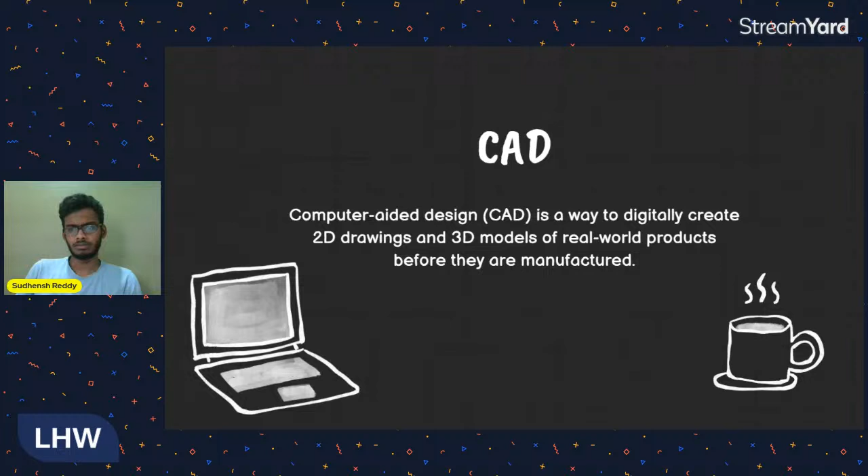CAD is abbreviated as computer aided design. CAD is simply a concept which we use to design 3D models, 2D drawings, or even circuits before we manufacture, in order to ensure that they work properly, to check the efficiency, to check the power dissipation, to check the force or the amount of stress a particular component can withstand. After getting the desired results, we go forward and manufacture those things.

Then we assign materials to it. We customize the appearance, the shape or size of the material. Then we apply simulations, put the material under some stress, some strain, some force, and draw reports from that. According to that, we can draw some really good insights on what you're manufacturing or making, so that we can have a better picture of the material when we actually manufacture it.

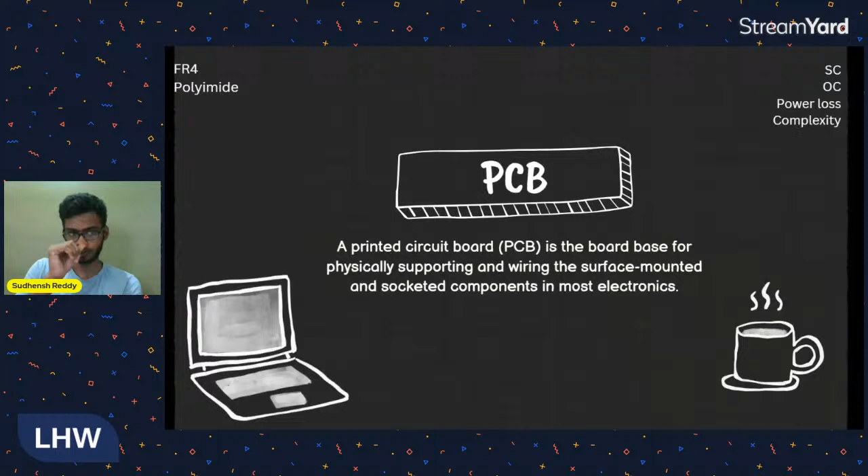Yeah. So first we'll look into PCBs. Our motive of this particular session will be mostly relying on PCBs. So what is a PCB? PCB is an insulating base on which we draw routing using copper layers, and then we mount our components onto it. So the inclusion of wires will be less. So the more wires you use, the more power it dissipates. The lesser you use, the more power you can save.

That is the reason we eliminate the wires totally, and then we embed those wires into the board. How and why, I'll explain. And these are the advantages which we get by using PCBs. The risk of short circuit and open circuit will be reduced, power loss will be reduced, and the complexity of the circuit will also be reduced.

Here are the materials which will be used for PCB manufacturing. FR4 is a very retardant material. It's a very rigid material. FR4 stands for FR means flame retardant, and 4 means it's a glass epoxy. FR4 is the material which we use for making rigid PCBs which can be broken when bent. And coming to polyimide, it is used for flexible PCBs.

Next, we'll have the composition of PCBs, what a PCB has to have in it to make it a PCB. Like basically, what are the parts or what are the layers a PCB will have? First of all, coming to substrate. Substrate will usually be made up of FR4 or polyimide, as I said. And over this substrate, we put on copper layers. Copper layer in the sense we wire those connections on the substrate.

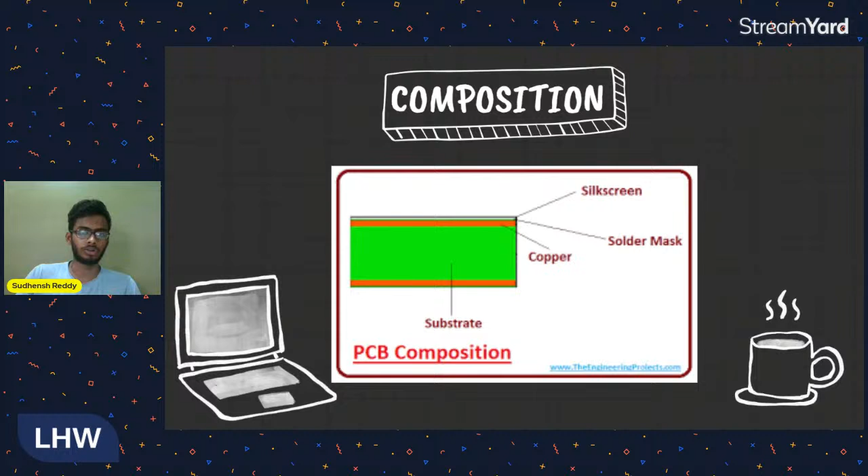On top of solder mask, we put on a silk screen. A few PCBs have a few naming conventions on that. Let's say I have a microcontroller, Arduino Uno. Arduino Uno has a bit of writing on it. The title of Arduino Uno, then each and every single pin named using some white sort of ink. That inking will be done on the silk screen, and it also gives the color and the glow of the PCB.

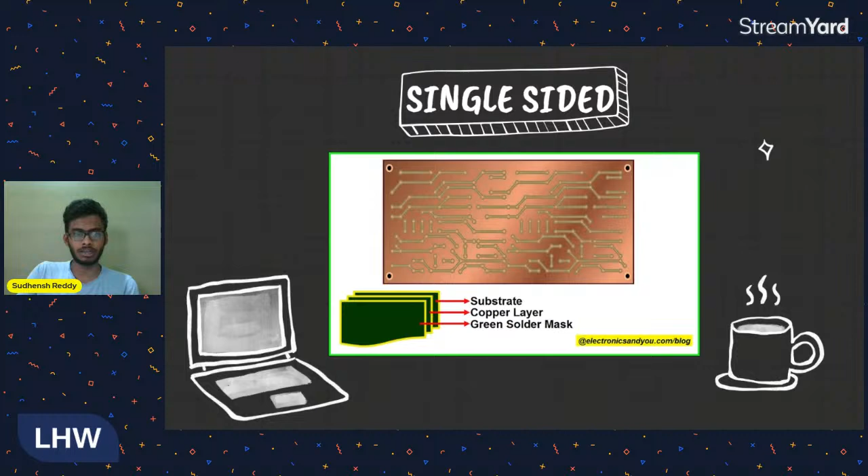Next, you have types of PCBs. All these types we'll look into in detail. First type being single-sided PCB. Single-sided PCB is a PCB which has a substrate in the middle. On top of that, we have copper layer. I mean, copper layer is only on one side of the PCB. Those sort of PCBs are called single-sided.

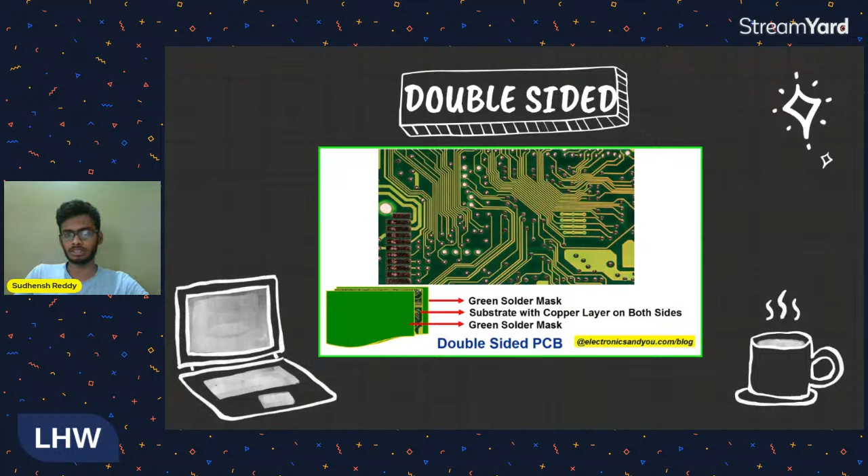Then we have double-sided. Double-sided has copper layers on both the sides. We have a substrate layer. On top, we have copper wiring. Underneath also, we have copper wiring. Solder mask and silk screen are mounted on top and bottom also.

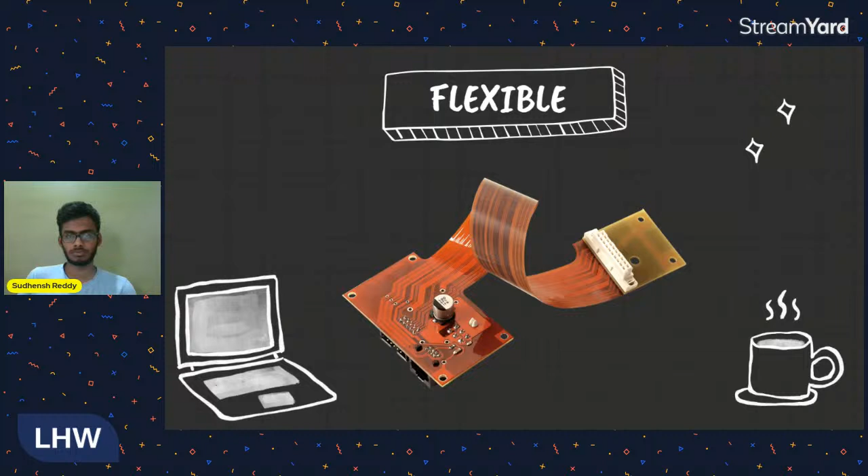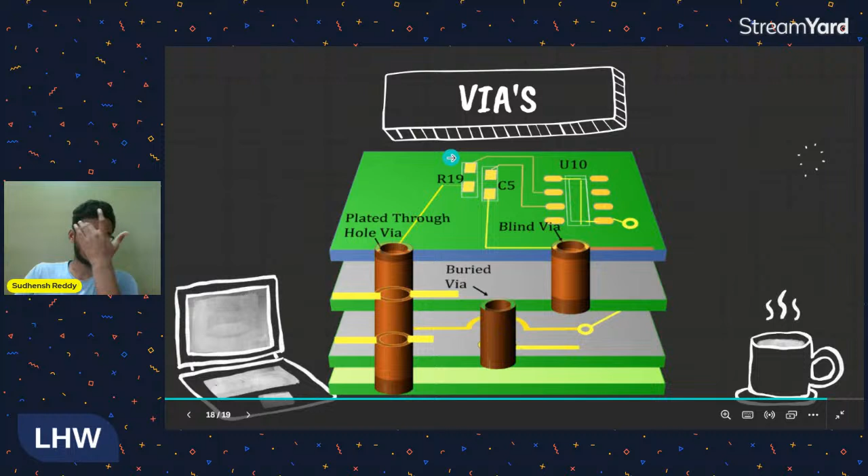Then we have vias. Vias are the concept which we use to connect the PCB layers. For example, here we can see the plated through hole via. Consider a multi-layered PCB. It has 4 layers, and a through hole via starts from the top of the PCB and goes to the bottommost layer of the PCB. Next, we have buried via. A buried via cannot be seen. It is somewhere in the middle, embedded between the top and the bottom layer.

Then we have blind via. Only one end of the via can be seen. The other is embedded somewhere in between. These are the parts which we use to connect the layers of the PCB. For example, the through-hole via connects the topmost and the bottommost layer. The buried via connects two layers somewhere in between the PCB, and the blind via connects the topmost to the second layer of the PCB.

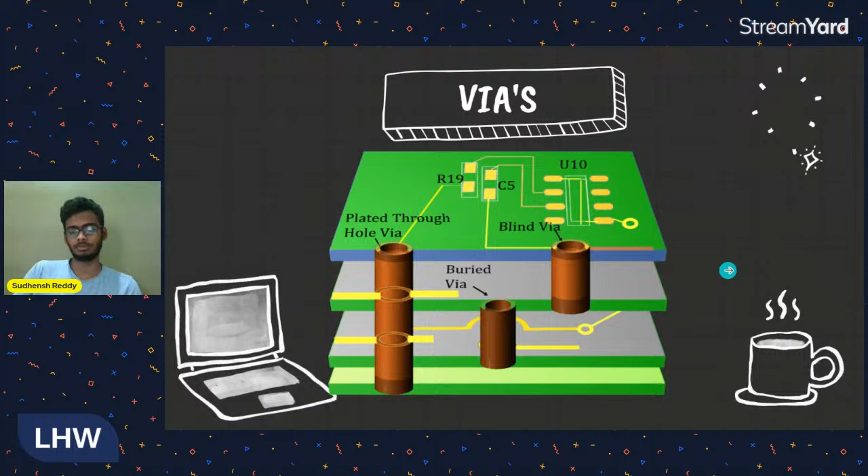These are the file formats which we use to design and manufacture PCBs. Coming to Gerber files and IPC files, these consist of the coordinates of the components and the wirings which we give in the software. I'll show you how to generate them. Then we have drill files. A few PCBs have holes to mount them onto something and make them steady. The size of the drill, the size of the hole, the diameter, the thickness of the PCB, etc., that kind of data will be held in drill files.

Then we have bill of materials. A PCB will definitely use some hardware components on it, and what we do is we create a bill of materials, in which we include the list of all the components which have to be mounted on it. Next, we have fabrication drawings. Fabrication drawings include the size and shape of the particular component or a particular PCB. We design these files and then we zip these files and we send them to the manufacturer.

Okay, this is it for the theory part. Next we'll be seeing how to design a PCB. Let me share my screen again.

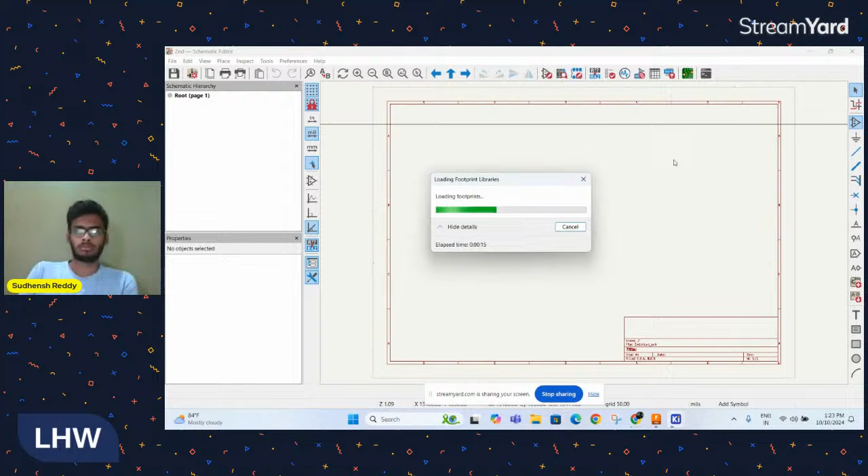First you have to open the schematic. Here we'll be designing the circuit of the PCB. Circuit in the sense the basic connections of the PCB, the basic materials, the basic components which we are using. For that, there is a symbol over here, Add Symbol. Click on that. All the libraries will be loaded. Let's wait till the libraries load.

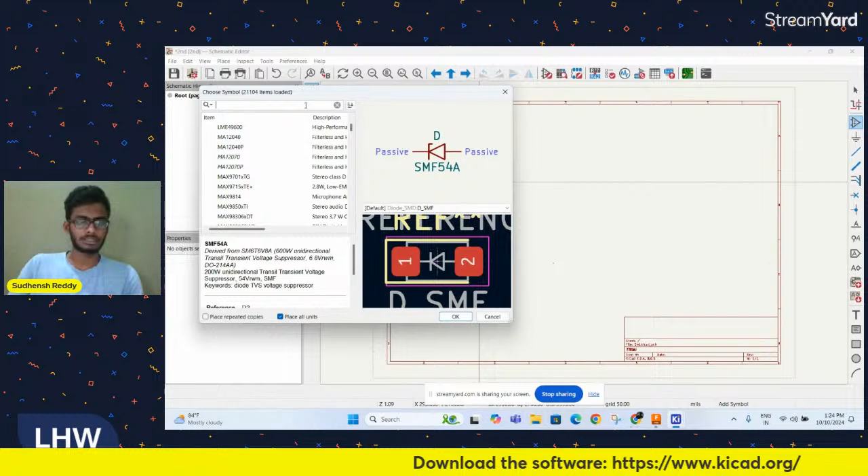Yeah. So these are the items. These are all the components which KiCad has inbuilt. You can also customize and build your own components in this. First, let me take a resistor and drag and click. As you can see, I've placed a resistor.

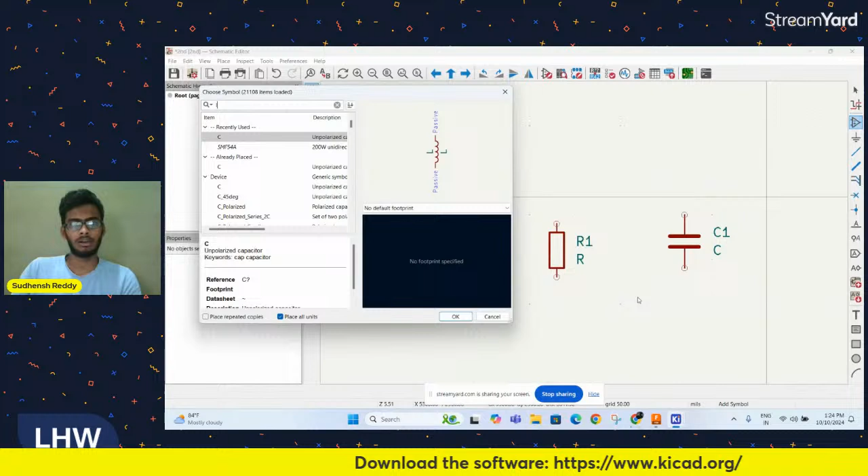Next, I'll go with the capacitor. I'll place it here. Then I'll go with an inductor, L. Okay. Now I have three components. I'll design a circuit which doesn't make sense, but just for a demo. Let's rotate this. Now let me connect these components together. All you have to do is hover your cursor at the terminals of the component. Just do this. Okay. Now my circuit is complete.

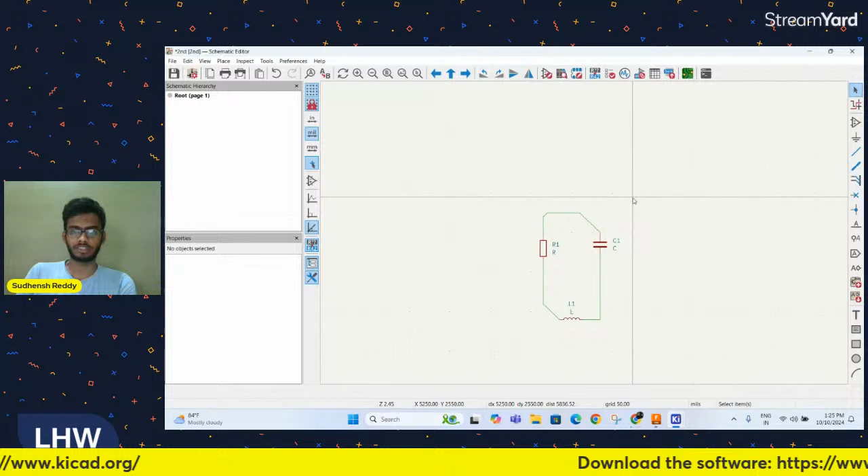Now, one important thing when it comes to PCBs, there are two simple terminologies we generally use: first one is symbol, and the second one is footprint. What is the difference between them? The things which you see over here, R1, a rectangle for the resistor, the two lines for capacitor, and the inductor symbol, these are known as symbols. Symbols are generally used to represent the particular component. Footprints represent the size and shape of the component which will appear after designing and manufacturing the PCB.

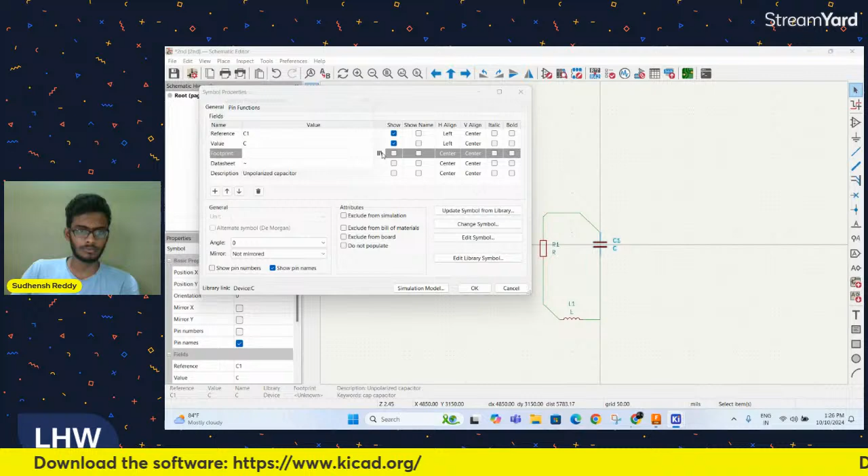For example, double click on this resistor. Here, as you can see, there is an option called footprint. We open the library and then I type resistor. These are all the footprints which we have. Each and every footprint has a different size and shape. As you can see, it is changing. So whatever footprint you need to use, you can use. I'll be using the first one, the footprint which I normally use. Every single component has its own footprints, so you can customize them as you wish. You can even design your own footprints in this software.

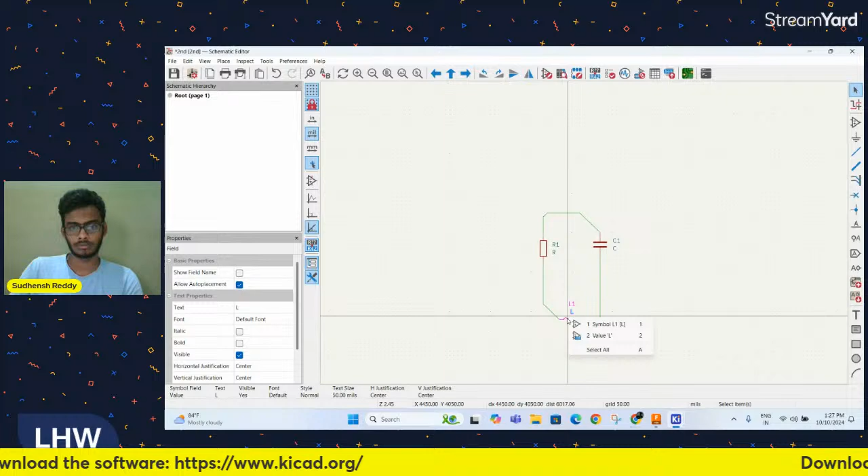Capacitor also has different sizes and shapes. I'll use the first one for now. Click on OK. Same goes with the inductor. Inductor also, I'll assign a footprint, and click on OK. Now that I have all my components, wired everything together and assigned footprints, I'll save it, go to Inspect and run ERC, electrical rules checker. It will check if I have any errors or warnings, any short circuits or open circuits. Once there are zero errors and zero warnings, you can proceed.

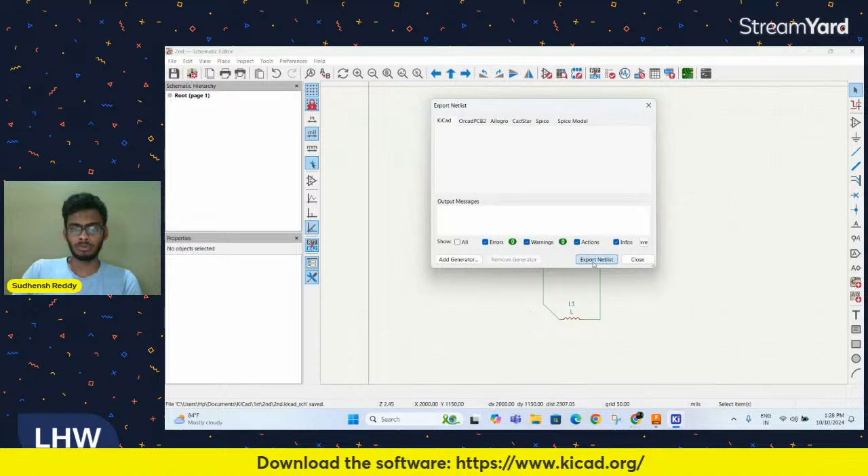Now we have to close this and export this into the PCB editor. This is a schematic editor; as I said, we design just the circuit here. In PCB editor, we design and customize our own PCB. For that, click on File, then Export, then Netlist. Now click on Export Netlist. Name it as you wish. I'll name it CH schematic, click OK, and click Save. For now, my work with schematic editor is done. I'll save it once more and minimize this.

Now, see. Second, this is the project file which I've created. Under this, we had a PCB file as well as a schematic file. But now I have a backup file as well as a .NET file. The .NET file represents the netlist file which we just exported from the schematic. So now I'll open my PCB file.

Yeah, this is the interface for the PCB editor. Here what I'll do is I'll click on File, I'll click on Import, I'll click on Netlist. Now click on this file and click on the .NET file which we just exported from the schematic editor, and click on Open. Now we have opened it. We have to load and test it. See here, total warnings are 0, errors are also 0. So we can proceed with that.

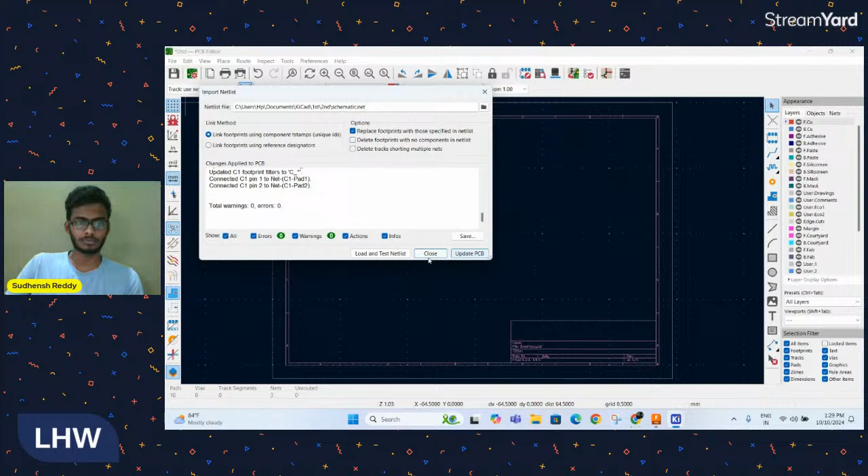Next, we click on Update PCB. Click on Close. Now we can see these are the components which we selected, and these are the footprints of them actually. And once you print the PCB, this is the original size of the components which will be appearing, the number of terminals and all. Now, this is the inductor, resistor, and capacitor.

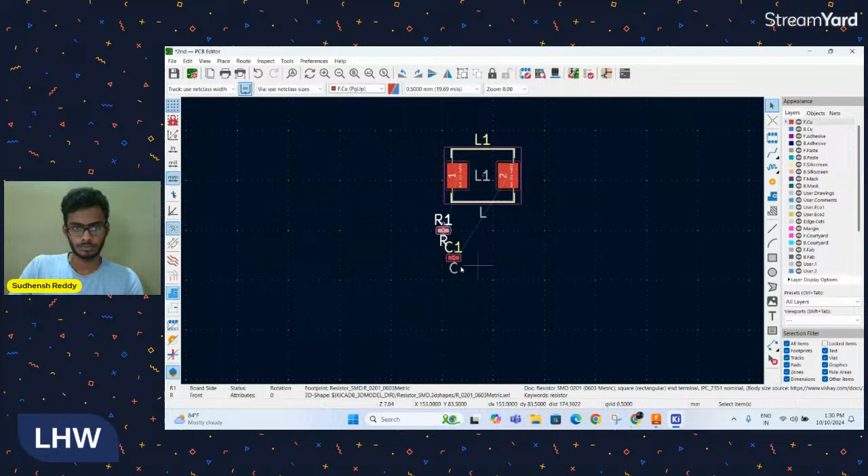So if you want to realign the components, just click on the component and click on M. You can simply click on M and you can move it. You don't have to drag, just hover the cursor and you can move. And next, I want my resistor to be more towards the right. So yeah, over here. Then I'll move my capacitor also. Click on M and I'll move it.

Okay. Now that I've moved, we'll start wiring also. As you can see, these faint blue lines represent the connections which you gave in the schematic editor. Apart from that, you have to manually wire also. You can use external plugins, but plugins can't be customized. That is the reason I'll try to manually wire them. So we'll use the route tracks over here. Select F.Cu copper wiring, and I click on this terminal and I'll simply wire them together. Done.

Now that the wiring has been done, the most important part of the PCB is the size and shape of the PCB, the edges of the PCB, how you want to customize them. I'll explain how to do that also. Now you can click on line and select the material as edge cuts. Now I want to assign some random shape to it. For example, like this. Done. So for now, this will be the outline of my PCB. All I have to do is save it, click on File, and Save.

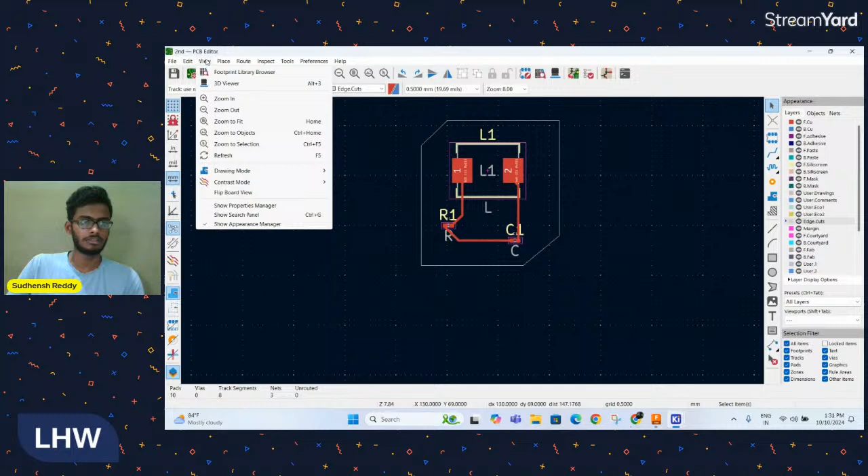Next, you have to go to View, 3D Viewer, and this is how my PCB will look after I manufacture it, after I print it. Okay. So now, as we are done with the PCB, I'll show you how to export this PCB and zip the files.

Click on File, and next click on Fabrication Outputs and click on Gerbers. So you'll find a pop-up, errors are 0 and warnings are 0. So click on Generate Drill Files, generate drill file, close. Now you can close this and minimize this, and you can see drill files. I've generated the drill files. Next we have to generate Gerber files also. Let me show. Click on File again, Fabrication Outputs, Gerber outputs, plot these ones. As soon as you see done, close. Now minimize this.

So for the copper wiring, for the edge cuts, for the silk screen, for each and every single component, a separate Gerber file will be generated. All you have to do is select all these files, zip them, and send it to the manufacturer. The manufacturer will decode these Gerber and drill files, and he'll print the PCB on the material which you intend to print. That's how PCB designing and PCB manufacturing works. I hope I'm clear for now.

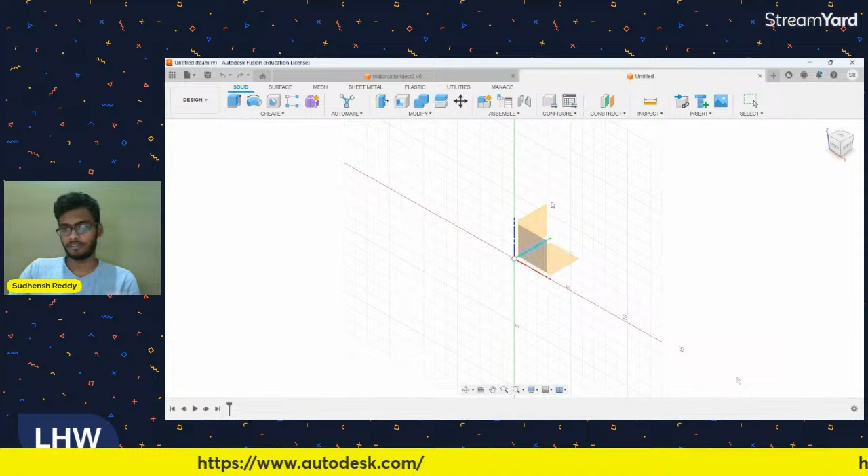So first we have create tools, then modify tools, assemble tools, construct tools. In Fusion 360, you can design 2D sketches as well as make them 3D. I'll show you how. First, click on create, then click on create sketch. Then click the plane: as you see, in 3D we have the XY, YZ, and ZX planes. Select whatever plane on which you want to create the 2D model. I'll select this one.

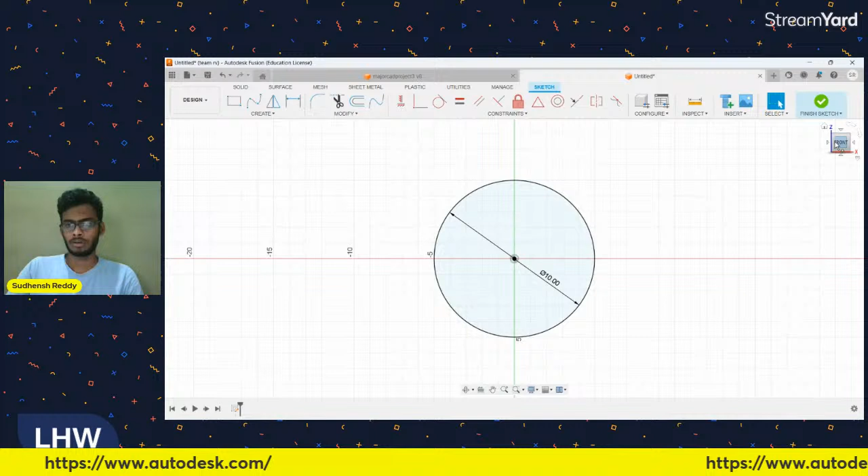Now click on create again. Here you'll get a few options of 2D diagrams. I'll select a circle, center diameter circle. Click in the center and drag. You can give it a measurement also. Now I have a 2D sketch of a circle. Next click on finish sketch. I have a 2D circle. Now how do I make this 3D? All you have to do is click on create again, then click on extrude.

The extrude option is used to add another dimension to the 2D model. As you can see, I have an arrow here. I can move this forward, making it 3D, or I can move it backward also. For now, I'll move it forward and give it a dimension of 5. Now I have a cylinder, made out of a circle.

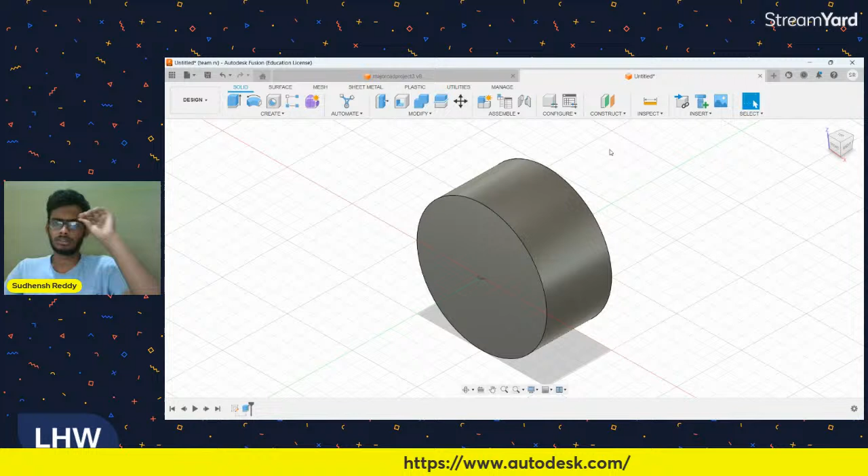Next, I'll show you how other tools work. We have hole. Hole is used to make this hollow, or create a single hole between the surfaces. I can move it, make it bigger, move it to the center, and I can also customize the depth of the hole. If I click OK, as you can see, the cylinder is hollowed now.

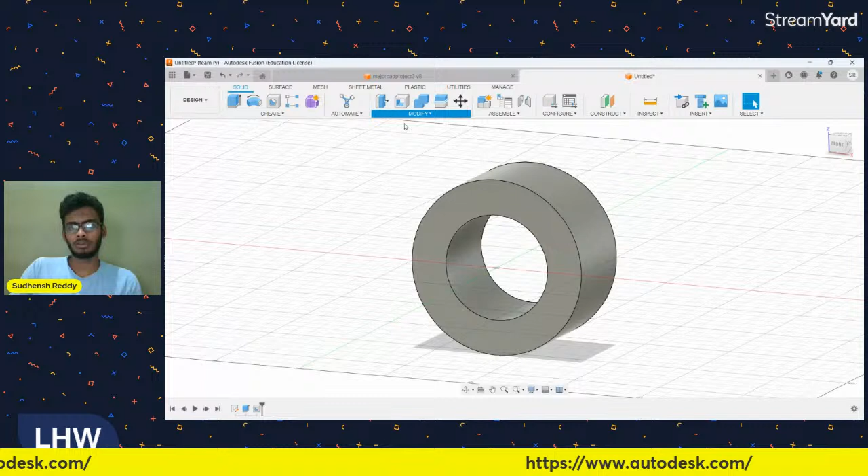Next we'll see a bit of the modify tools. In modify tools, we have press pull. Press pull is used to increase or decrease the size of a component. Let me select this face, and I can increase the size or decrease it. That's the use of the press pull option.

Next we have fillet. Fillet is used to smoothen up the edges. As you can see, it is not smoothened now. As soon as I push the arrow, the surface smoothens up — a curved surface will be appearing.

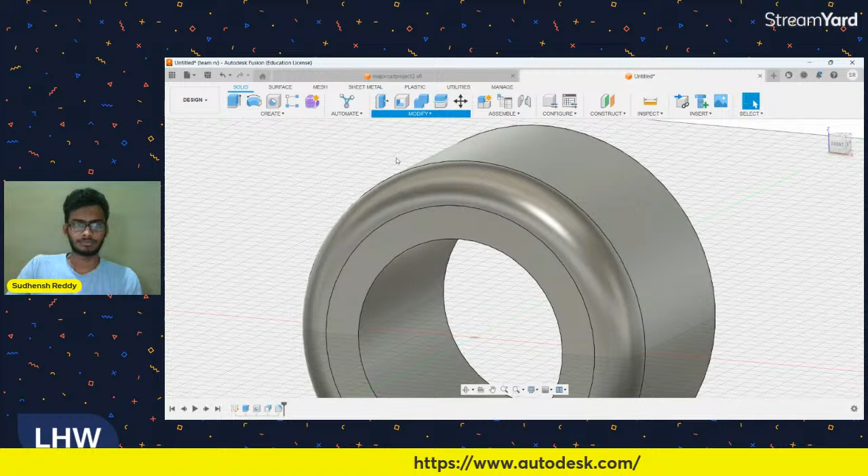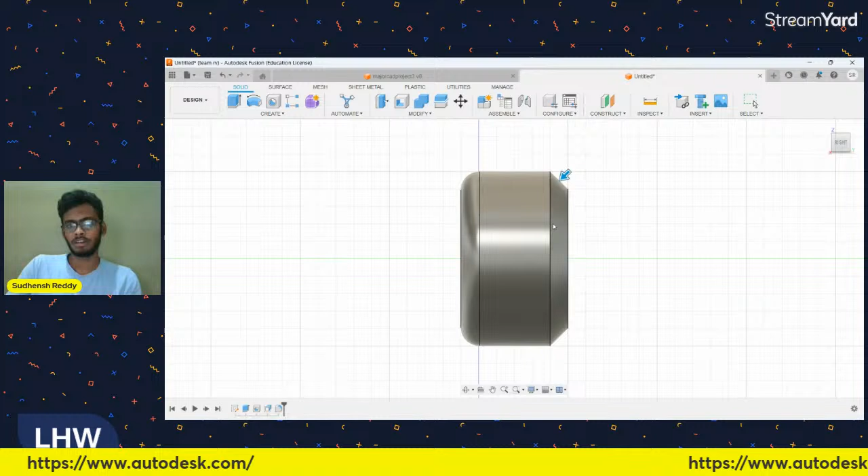Then we have chamfer. Chamfer doesn't necessarily smoothen it up, but it just gives it a planar sort of surface. Let me show you. This is the difference between a fillet and chamfer: fillet will simply smoothen up, curve up the surface, whereas chamfer just cuts it off.

Done. Next we have the shell tool. Shell is used to hollow up a surface. Then we have draft. Draft is used to cut a surface off, pulling a particular face into a single direction.

Scale. Scaling is used to increase or decrease the overall size of a material. The only difference between press pull and scale is press pull only changes one single dimension of the material, while scale changes all the dimensions of a material.

For example, I'll click on scale and select this. As you can see, the diameter, the thickness, and the length of the cylinder all change. Whereas when I use press pull, only one of the parameters can be changed at a time. That is the difference between press pull and scale.

Combine is used to combine two bodies into one single body. And next we have all these others — we don't use a lot of these tools. If you want, you can explore it a lot. This is actually a pretty fun software.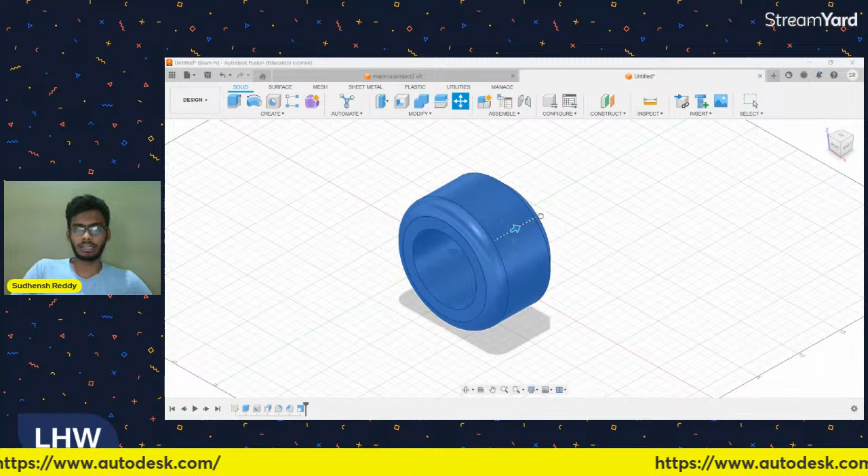Next we have move or copy. Move or copy is used to move a surface here and there in the plane, this way or this way, or I can simply rotate it in the direction which I want. That is the move option.

And then, if I want to create a copy of it, all I have to do is select the surface and click on create copy. As soon as I click on create copy, if I pull it in any direction, another copy of the material will be forming. That's the difference between the move option and the copy option.

Next we have the most important ones: physical material and appearances. Physical material changes the overall internal structure of the body.

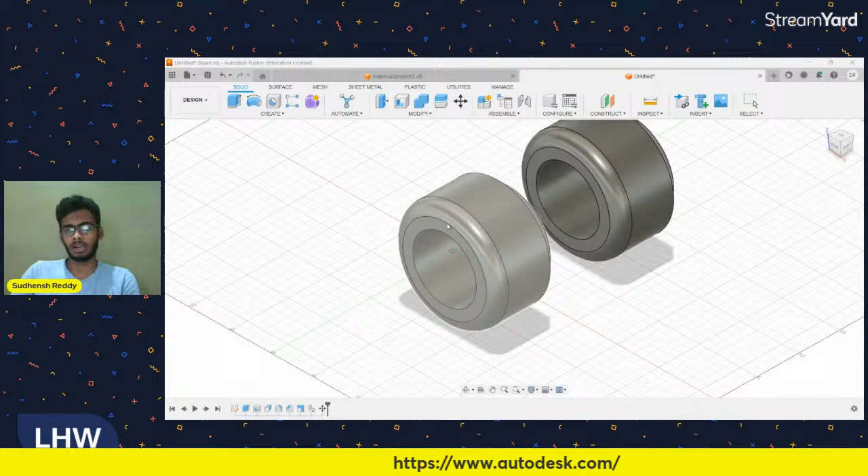For example, it's loading, wait a moment. As you can see, there are a lot of materials we can use: ceramic, electronics, liquid, metal, etc. The purpose of changing the material is for when we apply simulations on this. Mechanical components mainly depend on the material they are built up on. If I use a plastic material for this component and run simulations on it, the results will be different. Whereas if I use aluminum or steel, the results will be far more different, or maybe far more better. That is the reason we need to check whether we are using the right material or not.

I'll use, let's go with copper, cast copper. Drag and drop on both of them, and click on close.

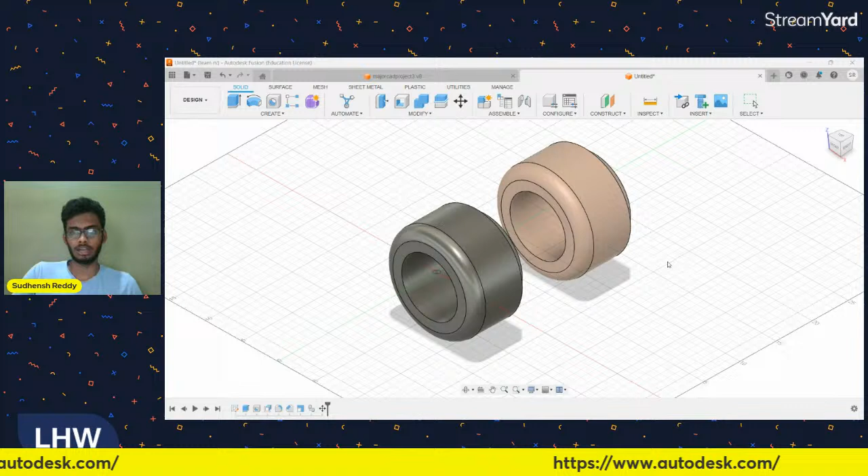The only difference between physical material and appearance is that physical material changes the component internally - the whole component will change its material. Whereas with appearance, if I select a material, the component will just be coated in that material. For example, let me take steel again. Here the internal material doesn't change - it's still copper, but just the outermost layer is now made of steel. I hope I'm clear. Now we can close this.

Now I've created two bodies. For time being, I'll delete the second one - we don't need it for now. Click on delete. Okay, now I have a singular body in my canvas.

Now I'll show you how to join two bodies. For that, I'll need to create another body, so we'll click on create sketch again. I'll select a plane. Now I'll create a cylinder which I need to fit into the previous body.

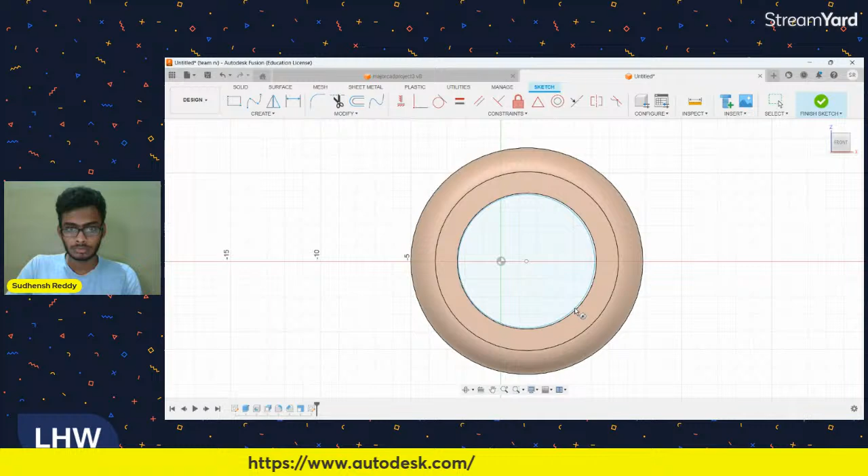So I'll click on circle again, center diameter circle, and I'll select the center and drag. Okay, now I'll click on finish sketch again. You see, there's a circle which I just drew, and we need to make it 3D again.

And guess what, we have to use extrude again. So click on create and click on extrude, then just press and pull, and I'll give it a random number as 20 - so 20 centimeters, new body, and okay.

One important thing is when you extrude a particular component, these are the operations which you can see: join, cut, and intersect. These options come to use when you try to extrude a body over another component.

For example, if you select join and you extrude your current component over an older component, then those two components will join and merge into one single body.

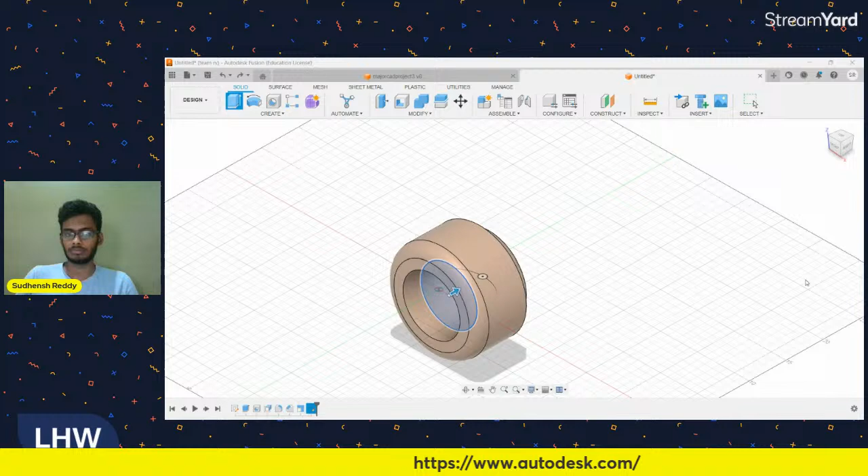Next, if I use cut, the current extruding which I do will simply cut off the material of the previous body. I'll show you an example - let me just draw a bigger circle.

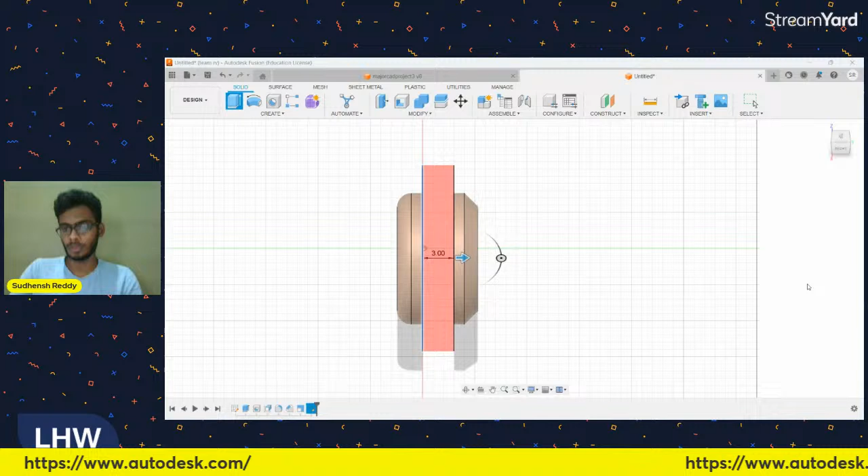Okay, now if I try to extrude this into the previous component which already exists, see the operation cut - click on that. The middle portion where I just extruded will just vanish.

And if I select the same circle again and extrude it again, but now I use join and click on OK, the previous component and the current component will simply merge into one single body. So you have to be careful here if you don't want to mess up your previous components.

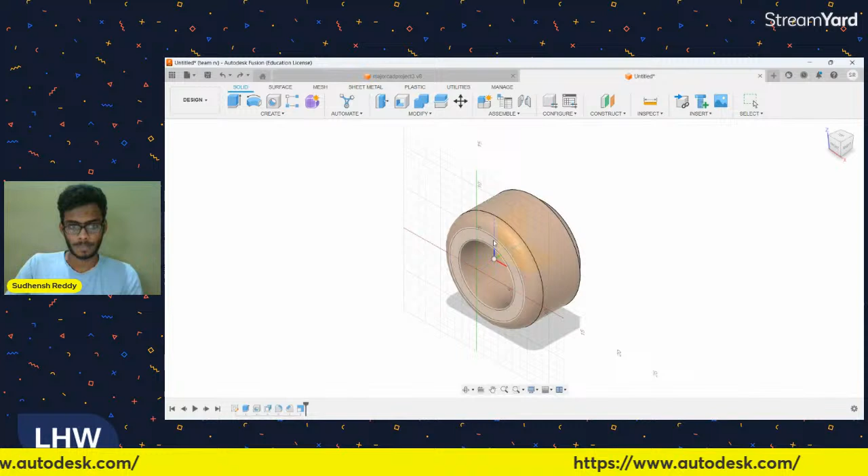I'll simply go back and create another circle - we'll continue with joints. And I'll extrude it, making it, and I'll select new component.

The difference between a body and a component is: a body forms when you extrude one single sketch one single time. If you combine multiple bodies, that forms into a component. You have to make sure you extrude it as a component, because you can apply joints only to components - bodies cannot be joined together using the joint option.

So I'll extrude this as a component now. Sorry, I made a mistake - I extruded the first cylinder as a body. You can edit that again - click on edit feature and then click on new component. No, no.

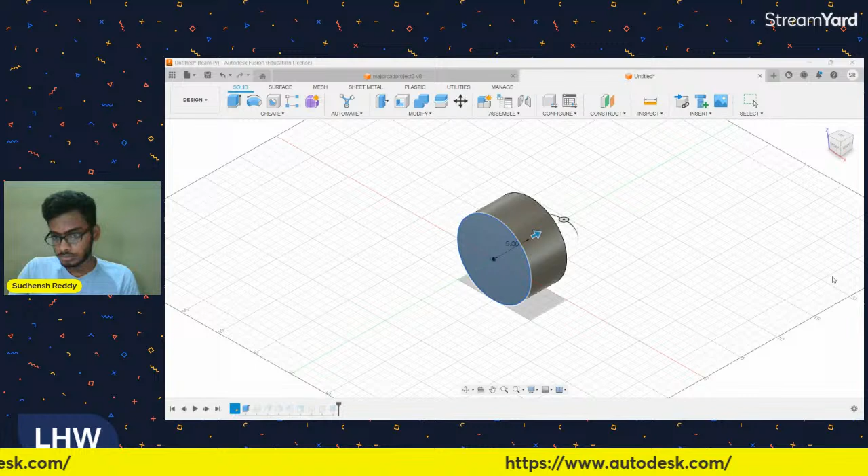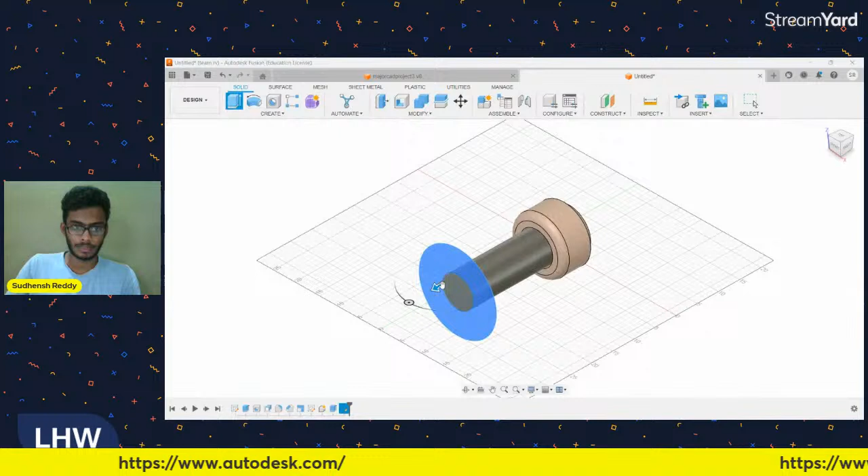Okay, we'll just design another cylinder for that. No worries, create sketch. Okay, and I'll select this and extrude this. So now I'll select new component again and click on OK.

This body is of no use, so I'll delete it for now. Delete - can't delete again. So now I have two separate components on which I can apply joints. I'll simply move this backward - move and copy, and I'll move this to separate them.

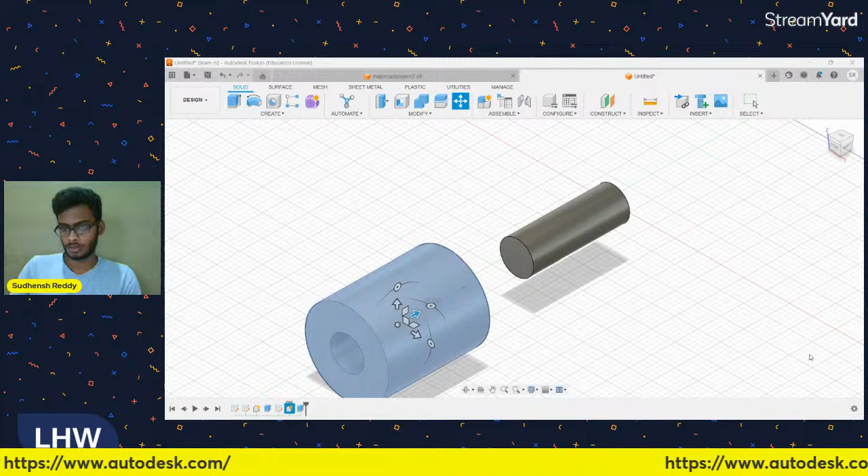Now I have two components - this is component one, and this is component two. On these two bodies, we'll try to add a few joints. For that, we have to click on assemble and click on joint. First thing, I'll show you the motions or the types of joints which we have in Fusion 360.

First of all, we have rigid joint - it will simply join the two components, but there will be no movement in that. Coming to revolute, in revolute the internal or external component can revolve inside or outside in clockwise or anti-clockwise direction, and that we can also customize. Then we have slider.

In slider, you can simply move one component inside and outside the body. Then we have cylindrical motion, which includes cylindrical and pin slot, much more common. Cylindrical and pin slot are a combination of slider and revolute. Coming to planar, we rotate a component in alignment with a single plane.

And next comes ball. For example, we have the ball and socket joint in our shoulder. The same sort of rotation, the same sort of movement we can give to the components.

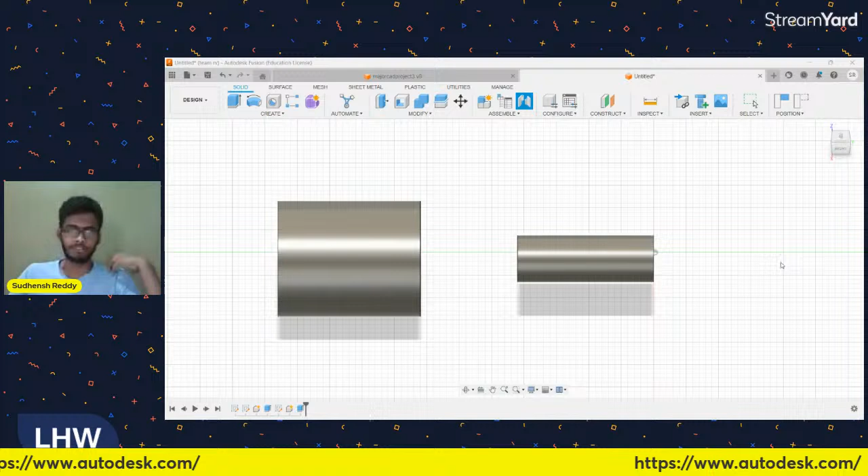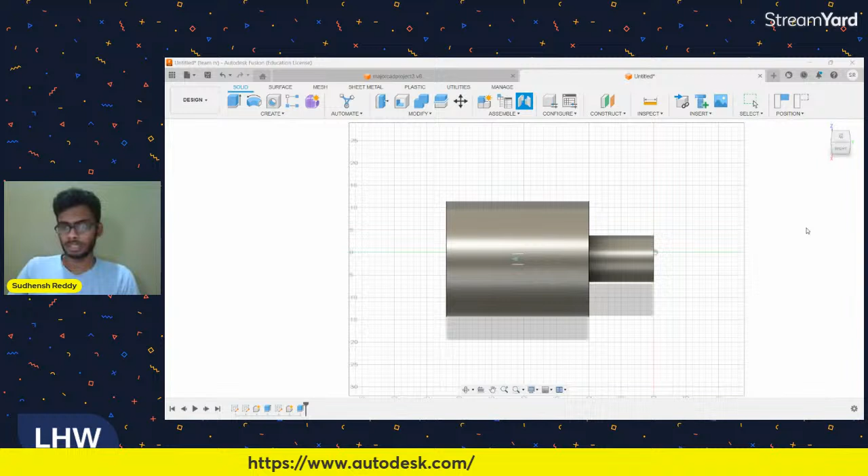So now I select the first component, which is this, and I'll select the second component, which is this. Now I'll give them some joint type. Rigid, it won't move. Revolute, it's actually revoluting. Slider, it will move in and out. Next we have cylindrical, it rotates as well as moves in and out. Pin slot, much more similar but in a different axis.

Next we have planar, I'll show planar again. Next we have ball, rotates just similar to our shoulder. For now, let's select revolute. As you can see, the revolution.

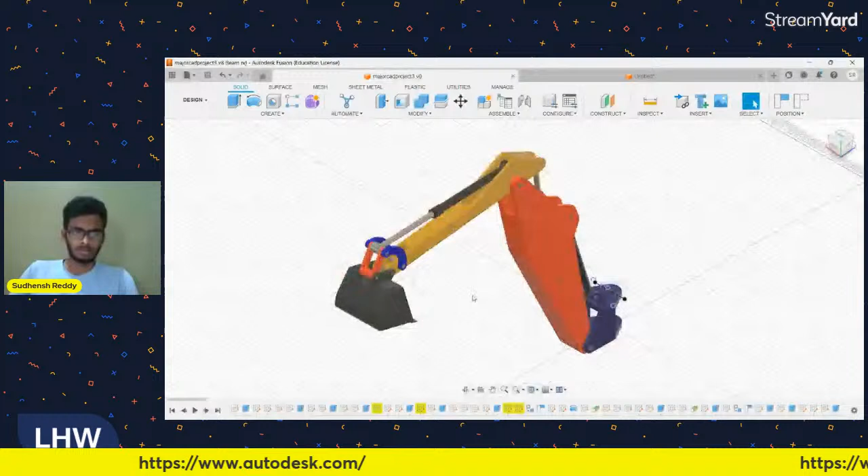So this is how you design and join a few things. Let me show one of my projects which I made by myself. It looks a bit complex, but it's very simple, very easy to make. All you have to do is ensure that your measurements are precise.

Just design stuff and join them properly. And these are all the joints which I use, a lot of revolute, and here are all the components which I used. And you can also move this here and there. Let me show.

You see, if your joints are properly functional, then you can also create these kind of movements and also generate a few animations with them.

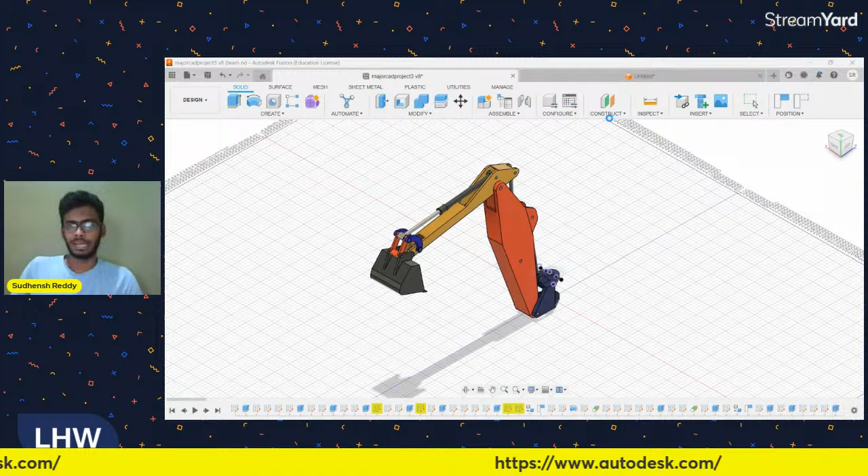I'll explain a few export types also for this. Let me save this. It's a bit laggy.

Now I have saved the component. Now to export this, you have to click on File, then click on Export, and these are all the file types which Fusion 360 supports for exporting. The most commonly used in Fusion 360 is F3D archive files, and for 3D printing we use STL files as well as OBJ files, which can be used for 3D printing.

I'll select STL and click on Export. Now my file will be exported directly into the folder which I choose, and that file can be imported into a slicer or a 3D printing software from which you can start your 3D printing.

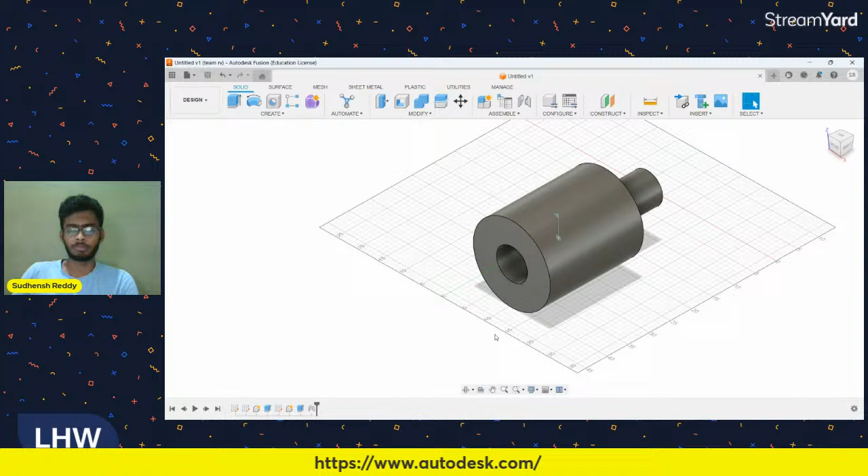Okay, now what else do we have with Fusion 360? We have this timeline. Timeline is a pretty handy tool which you can use. For example, I've done with my project, but I have to edit one single feature which I did long ago.

For example, this particular tool, this particular operation I did a long ago. I mean, this particular tool I extruded before extruding this one. So if I want to edit it, I can simply right click on this option and click on Edit Feature. Here I can edit it again.

For example, if I want to extrude it two sides, I can extrude. Or if I want to make it symmetric, I can make it symmetric. If I want to change the profile type, I can. If I want to change the distance or the taper angle or the operation also, I can change everything, and click OK.

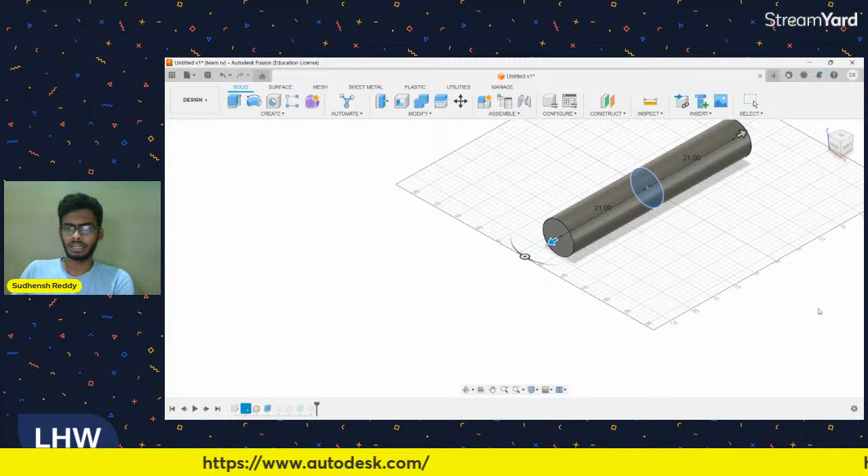But the later operations won't change again, they will remain intact. That is a positive thing about Fusion 360.

Other advantages are this particular software is reinforced with cloud. I mean, I can do one of my projects in one single device, open Fusion 360 in other device, log in through my account, and access the same project in the other devices also.

Okay, and there is also a mobile version of this software. In the mobile, you can use it to export and view your models, but you cannot edit them properly. So it's better to use a PC or a laptop for better comfort.

That is it with CAD and Fusion 360. We'll move further into circuit designing. Okay, any doubts with Fusion 360?

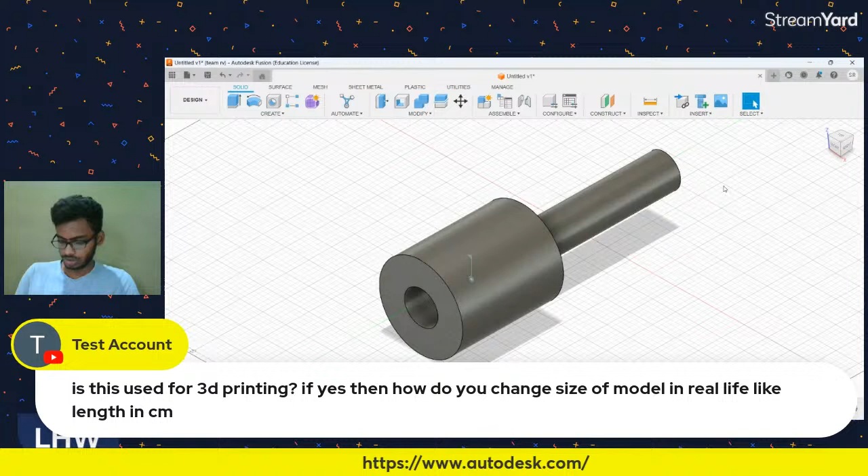I hope I was clear. Is this used for 3D printing? If yes, then how do you change size of model in real life, like length in centimeters? Yeah, this software can be used in 3D printing also. Any CAD software can be used. All you have to do is export the model as STL files or OBJ files.

And coming to your second question, how do you change size of model in real life, like length in centimeters? After 3D printing, there is no way to change the dimensions. If you want to change the dimensions, you have to change it in the software. Then you have to export it again as STL file or OBJ file. Then you have to import that file into the slicer or the 3D printing software. Then you have to reprint it again. There is no other way to change it.

Okay, hello. Would you recommend FreeCAD? It looks complex. Fusion 360 is the simplest one actually. FreeCAD is even more complex, as I have seen it. I've seen it once, but I didn't really think that it would be beginner friendly. Fusion 360 is better. As you can see, when you hover your cursor over them, every single option has a bit of description also.

If you are a beginner and you want some tutorials, this has inbuilt tutorials also. Sweep, again, it has a tutorial on what that tool does. Then you have loft, rib, etc. So I think Fusion 360 is better for beginners, not FreeCAD. I hope I'm clear. Done.

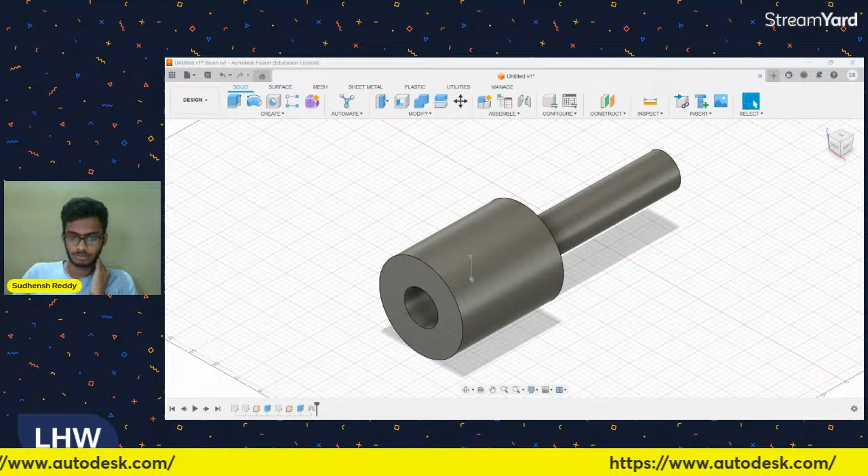Yeah, let's move on. We'll look into Tinkercad. Let me stop my screen. Yeah, Tinkercad is also one of the tools which is provided by Autodesk. Tinkercad is completely free. You don't have to use any sort of educational license or your ID card verification for that. You can access it anywhere. All you have to do is create your own account in that. I'll show how to use it and how to create a few circuits and how to simulate them also.

And coming to the important thing, the softwares which I just explained, Fusion 360 and KiCad, can also be used for freelancing. If you're a student and you want to earn some money without actually getting into a job, you can simply freelance. You can find opportunities on LinkedIn and in a few CAD and PCB communities also. So you can start it whenever you want. Whenever you have free time, just sit down, create an account, download the softwares, and you can tinker with them. No worries.

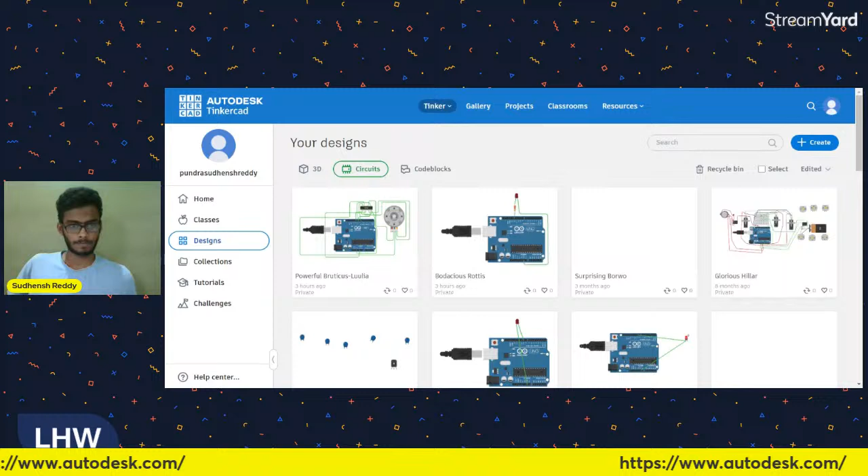And these softwares don't have any sort of project limit. You can create any number of projects you want. Okay? There is no limit. Next, we'll go with Tinkercad. Okay. Now, once you create your account, this is the user interface which you'll get once you open the tool. This is not exactly a software; it's a web tool, a website-based tool.

Here you can create code blocks, you can create circuits as well as 3D designs also. But for 3D designs and code blocks, it's not very efficient. But circuit designing might be a good option in this particular tool. So yeah, here are some of the designs I've made. I generally use this for circuit building. These are all the circuits which I made so far. Whenever I'm free, I'll simply open Tinkercad and start building circuits. This is also a fun tool which you can use for your projects as well as for passing your time. We'll see how to generate circuits over here first.

So once you create a new circuit, this will be the canvas where you can build your circuits. Let's build a simple switch circuit. Maybe I'll take an LED, then a resistor, then a switch. So we don't need a switch actually. Oh yeah. Then a battery. Three volts battery should be enough.

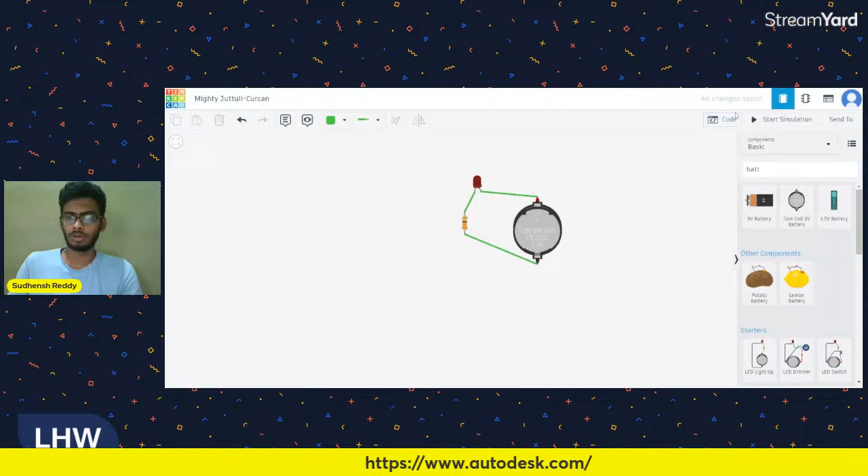I'll go with Arduino Uno. Click, and now I have an Arduino Uno. Arduino Uno is the most basic and the most commonly used microcontroller-based development board. On this, we have 14 digital pins and 6 analog pins.

This particular board can be used for making beginner projects, for example, traffic lights or a simple attendance marking system. From those basic projects, you can also use this to implement complex communication protocols, for example, serial peripheral interface, inter-integrated circuit protocol, or UART. Those are just a few examples.

A pretty handy component this is. It comes at around 600 to 700 rupees outside. You can just buy it and use it for your daily use projects as well as a few complex projects which you can use in your major projects in your coming years, in third or fourth year of your engineering.

Okay, now this is the complete board, and through this port you give power to this. You connect the USB cable to your laptop and to this port, then it will start. And next, this black IC which you see is the ATmega328P. ATmega328P, this is the actual microcontroller. The microcontroller is expanded and made into a single board.

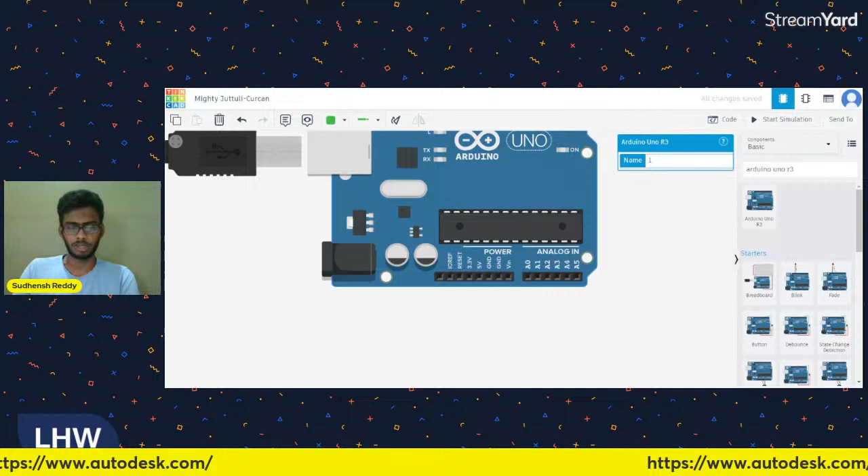Inside this microcontroller we have timers, counters, a miniature microprocessor, and a bit of storage also. As you can see, these are the power pins, analog pins, and then we have digital pins. The TX and RX pins are used for implementing communication protocols. Those can be wired protocols as well as wireless protocols.

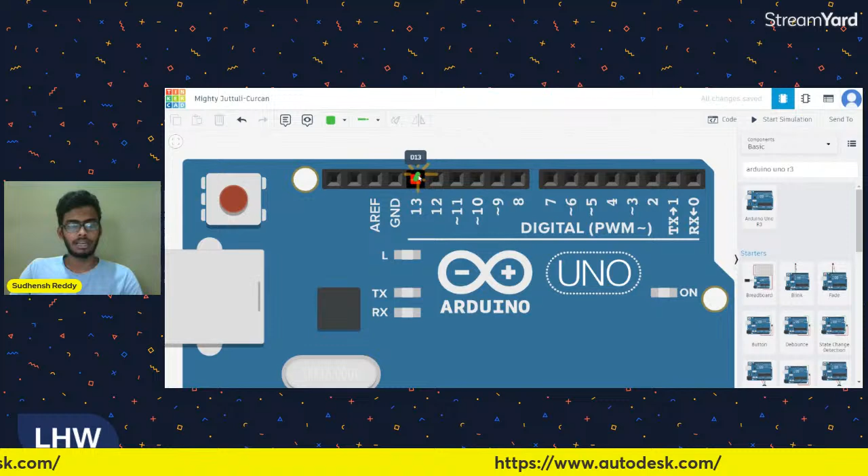Now, this particular microcontroller has an inbuilt LED at pin number 13. 13 is a digital pin. So we'll try to code that. I'll show you how to code that. Click on code. Here you have three options. You can code in blocks, in blocks and text, or in just text. I click on text and continue.

Here you have a default code for the inbuilt LED. I'll explain how the code works. The code for Arduino has two main driver functions, void setup and void loop, which have to exist in the program for Arduino Uno. Void setup is used to define the pins, and void loop is to write the logic for the pins.

For now, here the 13th pin, which is the built-in LED pin, I define that pin and I give output from it. Digital pins can have two functions: either give output or take input. You'll use input if you are using external sensors from which you have to take input. Then you can simply give the pin here, let's say the 12th pin, and write input. So you're just informing the microcontroller whether to take input or give output from this particular pin. Let's keep it unchanged for now.

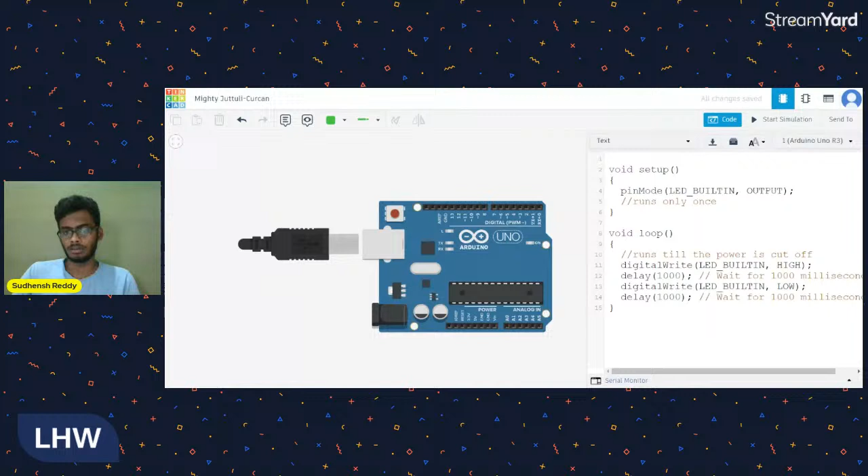Yeah. So void setup: as soon as you code this microcontroller and give power to it, void setup will run just once, whereas void loop will run till the power supply is cut off. Okay. Now, as we are done with code, we'll start simulation, and we have a simulation timer also.

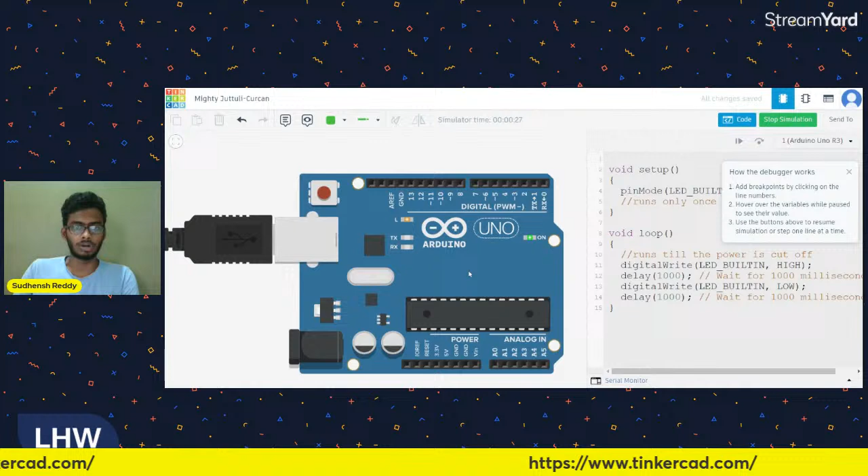As you can see, here is the built-in LED. It is blinking. I mean, it will stay on for 1000 milliseconds, which is 1 second, and it will turn off for 1000 milliseconds. Okay, and this is the LED which is used to determine whether the Arduino Uno is on or off. And there is a simulation timer also, and you can stop simulation and you can derive your required results.

So if we write some important things in loop, then it will be initialized again and again, right? I didn't get your question. Some important things in loop. Yeah, exactly. It doesn't matter what sort of function, what sort of operations you want to do. If you put those operations in void loop, it will keep on running till the power supply is cut off.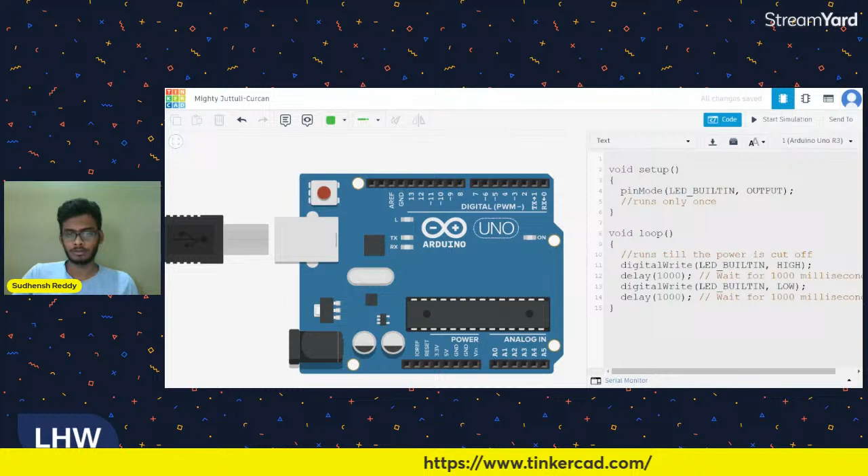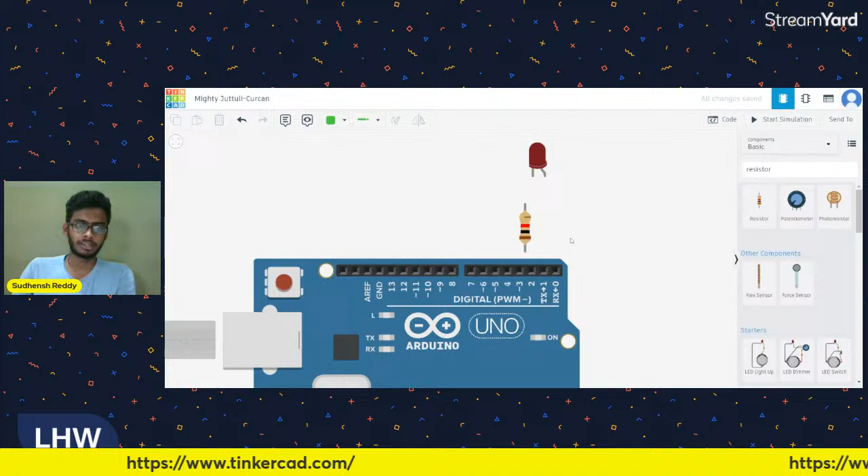Okay. Now we'll try to include some other components and we'll try to code them if time permits. Now let's take an LED. I'll take an LED and I'll drag and drop. Now we'll take a resistor and I'll place it over here. Now we'll start connecting it. The reason I'm placing the resistor is from the digital pins we get an output of 5 volts, but for an LED if we give 5 volts directly the LED won't work. It will simply burn off. That is the reason we are including a resistor also.

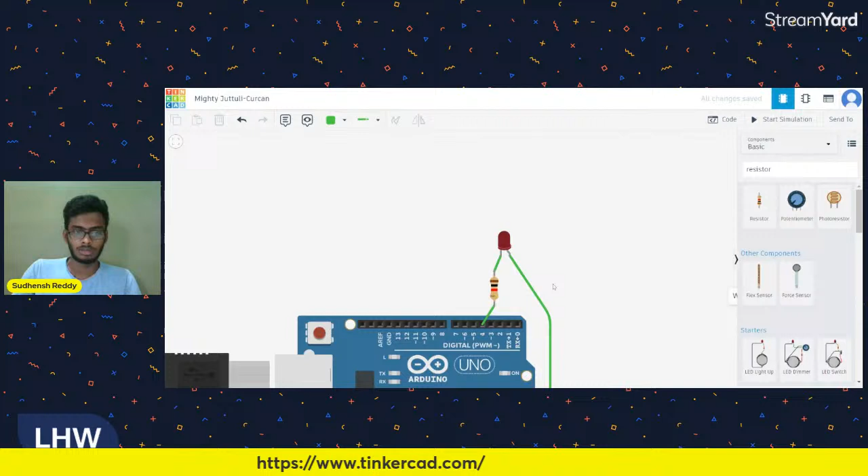I'll rotate this and we'll start connecting it. So we'll connect the anode with the resistor and we'll connect the resistor to any digital pin, let's say fourth. Next you have to connect this cathode to the ground we have over here. Yes. So now the circuit is done for now. Next we'll try to code this. I'll show you how to code this from scratch.

We'll simply delete this. As you can see, the positive pin of the LED is connected to the fourth pin, so to the LED we are giving power from the fourth pin. So let's define that first: int LED is equal to 4 semicolon. Next we'll start void setup first. Next pin mode. Open your brackets. I have defined the fourth pin as LED, so I can simply use LED over here, comma OUTPUT. Through this, we are informing that from the fourth pin, the Arduino Uno has to give output. Now I can simply close the parenthesis.

Next, void loop. Again, open parenthesis. As I said, default output from the Arduino will be low. So the first instruction will be digitalWrite. Open the brackets. Then the pin name, which is LED, comma HIGH. Note one thing: these expressions, OUTPUT, HIGH or LOW, are supposed to be in uppercase. A semicolon. Next, we'll give a delay of 1000 milliseconds. Next, digitalWrite LED, comma LOW. Next, a delay of 1000 milliseconds again. Next, close.

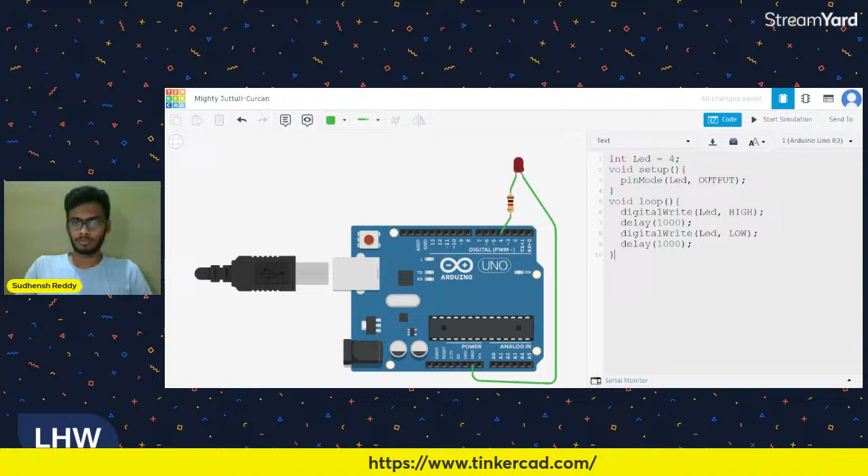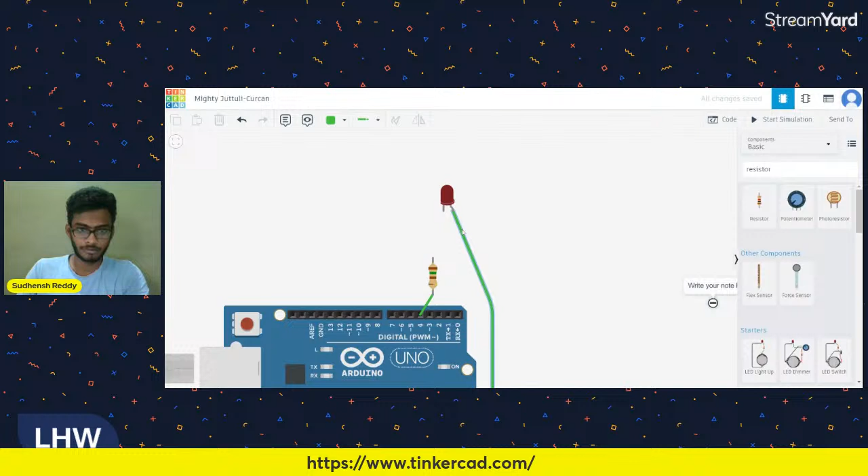Okay, now that we are done with the code, let's check for any mistakes. Wait a moment. My bad. We need to give the resistance also. 220. That'd be good. Start simulation. No, the resistance is too high. So 150 maybe. Simulation. What happened? Just a moment. Let me figure it out. Did I give my connections wrong? Yeah, I didn't give the connections right.

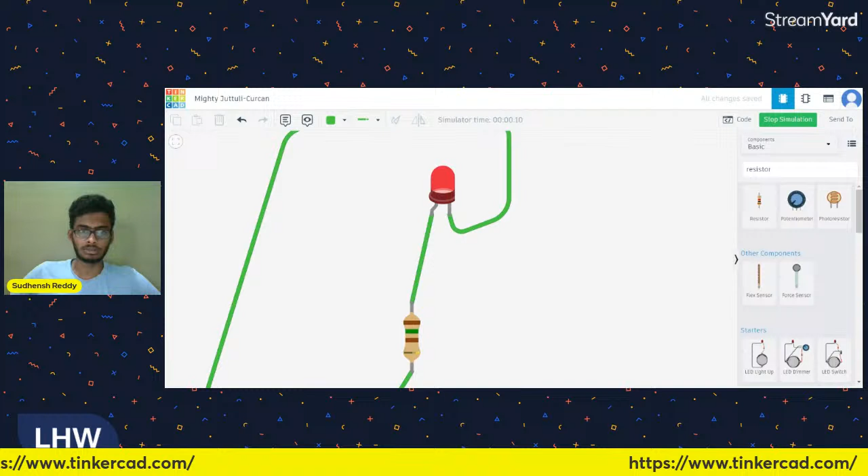As you can see, the LED is staying on for 1 second, and it is staying off for another second. Okay, that is how you use Tinkercad. I'll show you around a few of my projects which I did in this tool.

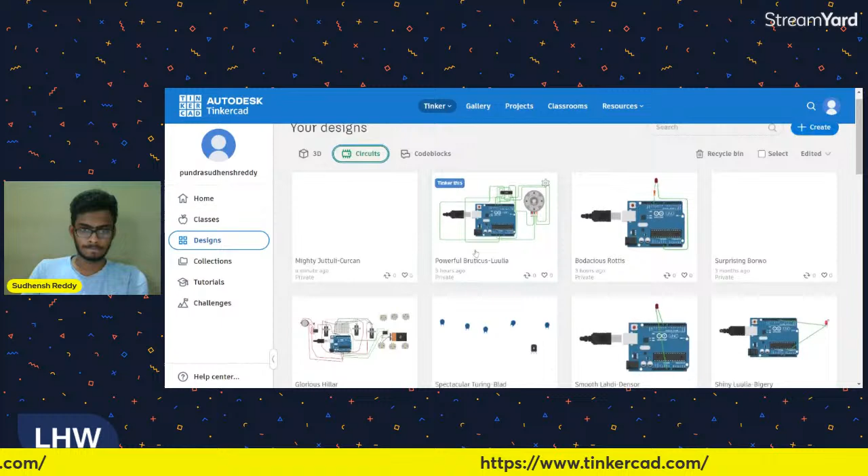We'll go to designs and circuits. Yeah, this was a design which I made to interface a motor driver, Arduino Uno, and a stepper motor. I should have included a resistor over here, and here is the code for it.

And if I start simulation, the input power to the motor driver is way too high, so it will simply burn off. You see, and when this symbol appears on the component, it indicates that the load is way too high or the input power is way too high. Okay, so that was one of my projects, and yeah, here are a few more projects.

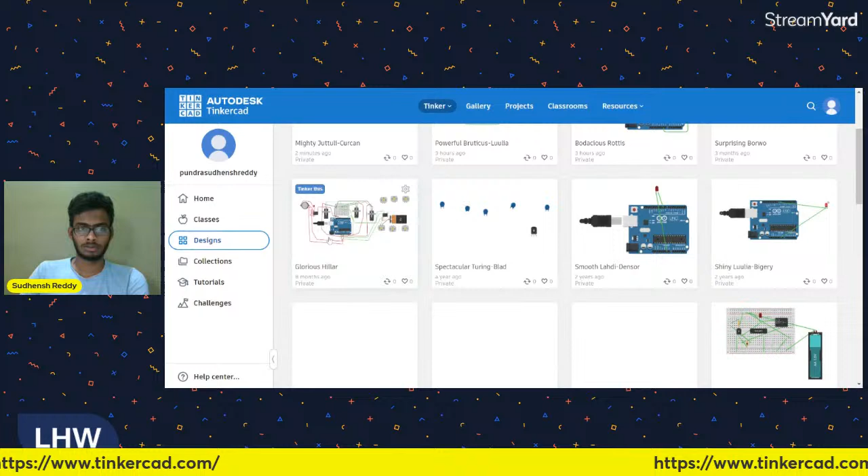The only disadvantage of this is if you don't find your required component in this software, in this tool, you cannot import or export from any other software. I mean, let's say it doesn't have a normal two-way switch. If I click a switch, the only switches it shows us are push button and slide switch. Okay, but I don't find a normal switch over here, a two-way switch or a one-way switch.

That's a disadvantage. If I want to include a two-way switch or a one-way switch, I cannot. I need to use some other software again. In Tinkercad, I cannot do it. So if you want to use Tinkercad, you have to use it only when all the components which you need are available in this. Okay.

Else, if you don't want to use this, you can use Proteus also. In Proteus, you can include external libraries, but that's a pretty complex software. It's not really for beginners. A lot of expertise is needed. I don't hold a lot of expertise in that also.

All you have to do is install the software, then you can download libraries from GitHub, then you copy paste those libraries in the program files, and then you can access the libraries. And you have to use some external softwares to code those components separately. You have to again export the code from that software into Proteus. Then you have to run simulations. That's a pretty complex, professional level software. So we'll leave it away for now.

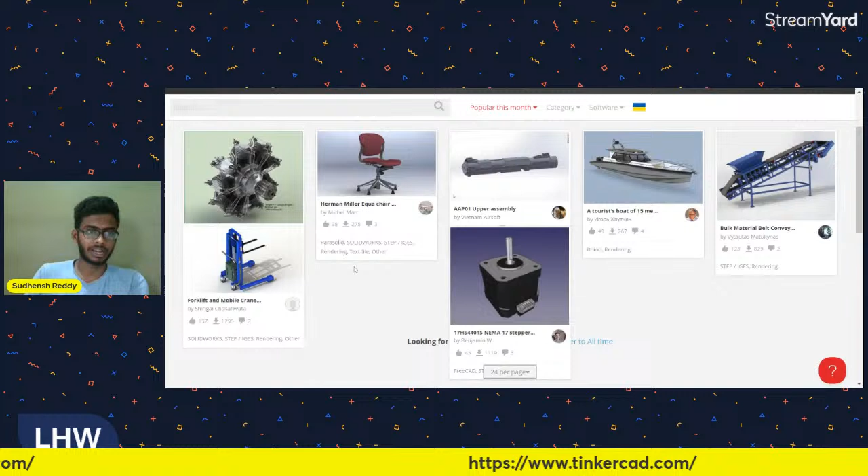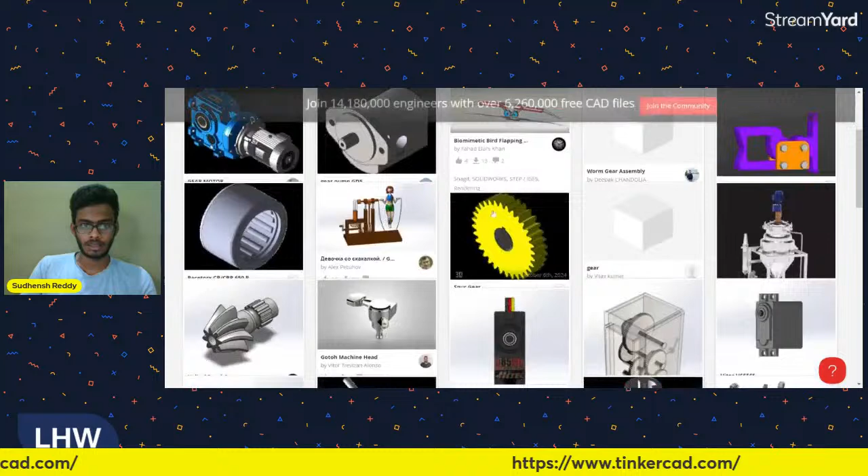There are a lot of models, and not only for Fusion 360. If you need this for any other softwares also, for example, SolidWorks or AutoCAD, you can do it. For example, I need a gear. I'll search for it, and I'll find a few relevant models. And here you can see SolidWorks, STEP or IGES, and those are the file extensions which this particular tool has.

And you can also select the software or category which you need. For example, if you need for Fusion 360, you can select Fusion 360 in this drop down, and yeah, gears related to Fusion 360 will be displayed. Okay, for example, I click on this, and then if I want to download files, it will ask for something. I forgot my password. I'm sorry for that.

Once you download that, a zip file will be downloaded. From that, you need to export the models. Then you have to go back to your Fusion 360. Then click on Data Panel and click on Assets and click on Upload. Once you click on Upload, you can simply import the libraries which you downloaded from GrabCAD, and then you unzip the file, and then you can include that into this.

And here are a few things which I already imported. This is a soap dispenser. It takes time to render, but yeah. Yeah, this model I imported. I downloaded it from GrabCAD. I unzipped it and I imported it to Fusion 360. On this, you can further apply whatever operations or whatever tools you want to use.

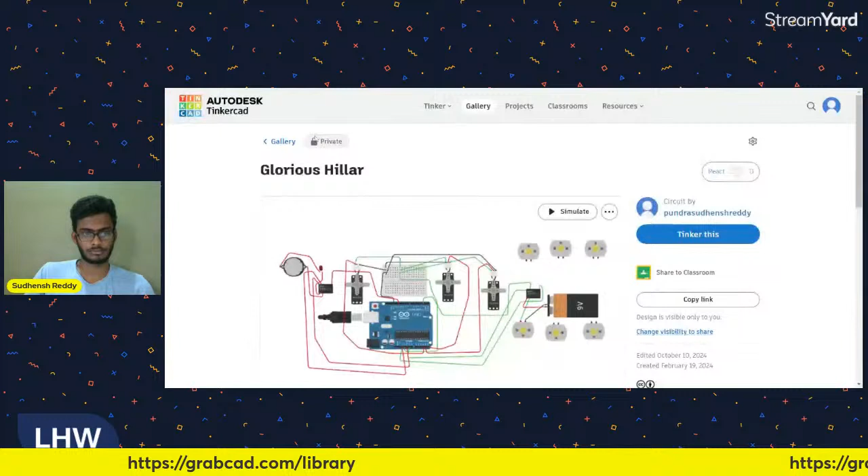Yeah, I think I get your question. It might be a glitch in the tool, but there's something called: if it works, just leave it alone. That's what I applied over there. Okay. Any other doubts? It should be a glitch actually. I worked on a lot of projects using Tinkercad, but I never faced that particular problem.

Any more doubts, or any more recommendations which you would like from me regarding hardware? If there are no doubts, I think I'm done with the session.